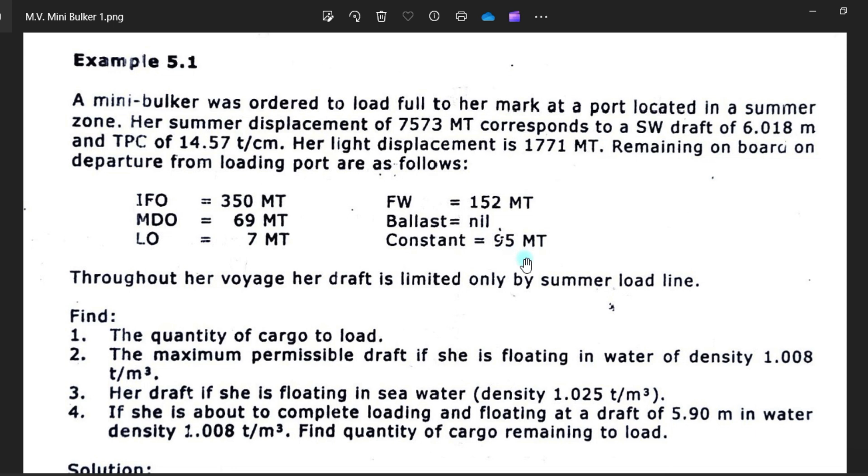And it says here, throughout her voyage, her draft is limited only by summer load line. So throughout the voyage, the vessel should maintain the summer load line mark.

Okay, and this question is find. Number one, quantity of cargo to load, the maximum permissible draft if she is floating in water density of 1.008 tons per cubic meter. So meaning, what will be her draft when the vessel floats at 1.008 at loading port?

Her draft if she is floating at sea water density of 1.025. So what will be her seawater draft when she is outside the ocean with a density of 1.025?

If she is about to complete loading and floating at a draft of 5.90 meters and water density of 1.008, find the quantity of cargo remaining to load. So when the vessel at port, when loading, reaches a draft of 5.90 meters, what will be the remaining cargo if the vessel floats at a density of 1.008?

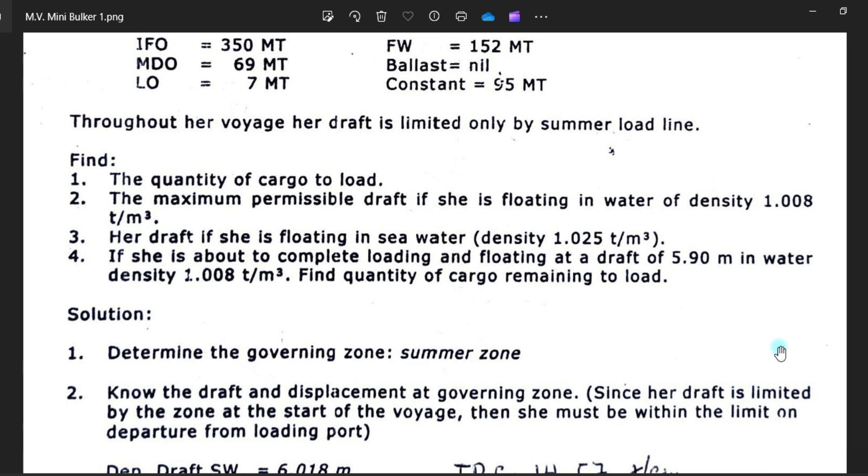Okay, and this is the solution. Determine the governing zone. The governing zone is summer draft because she is floating within the summer zone. Know the draft and displacement of the governing zone. So the vessel is in the area of the summer draft, which is 6.018. This will be her departure draft at loading port, and the displacement of this draft is 7573 metric tons, and the TPC is 14.57. So let's investigate.

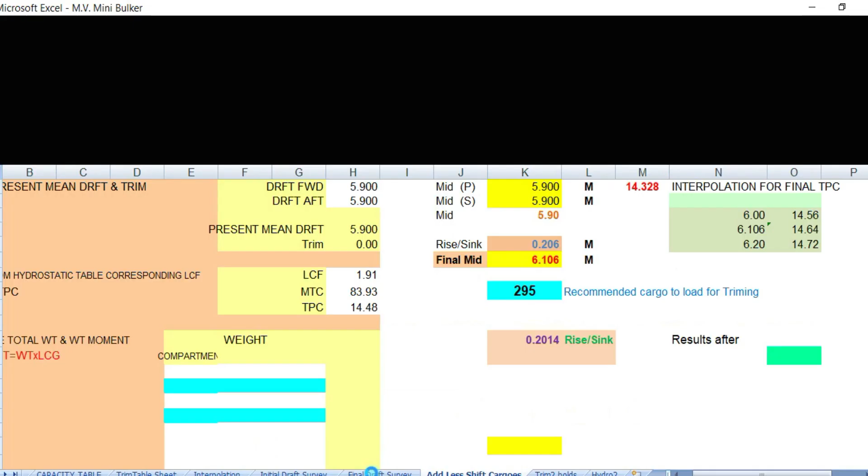Summer draft, maximum summer draft is 6.018. Let's see this one. Then we go to the capacity table.

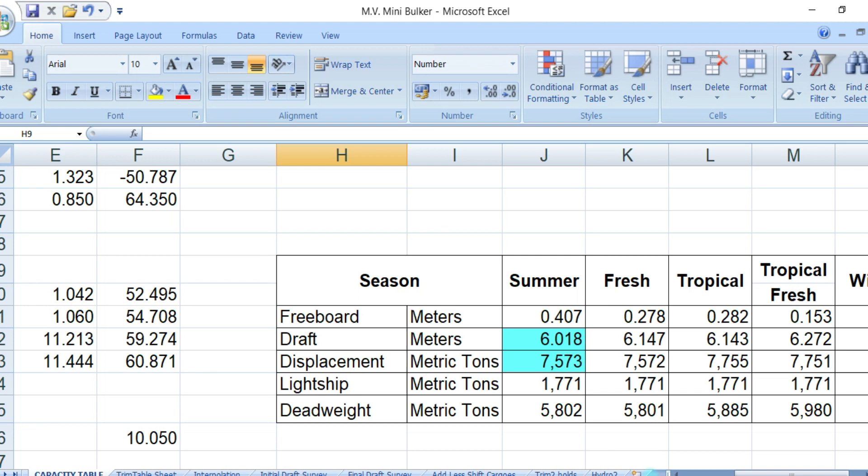So summer, this is the load line location, and the draft of summer is 6.018, and the displacement of summer draft is 7,573, and the light ship is 1,771. Okay, then we go.

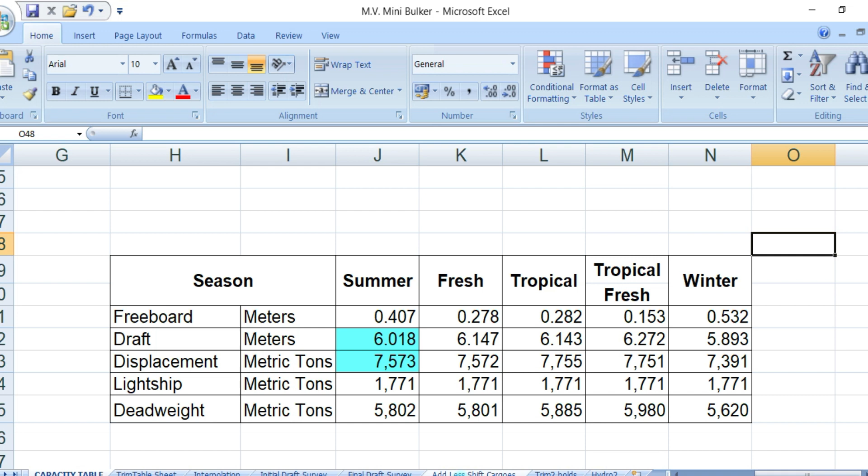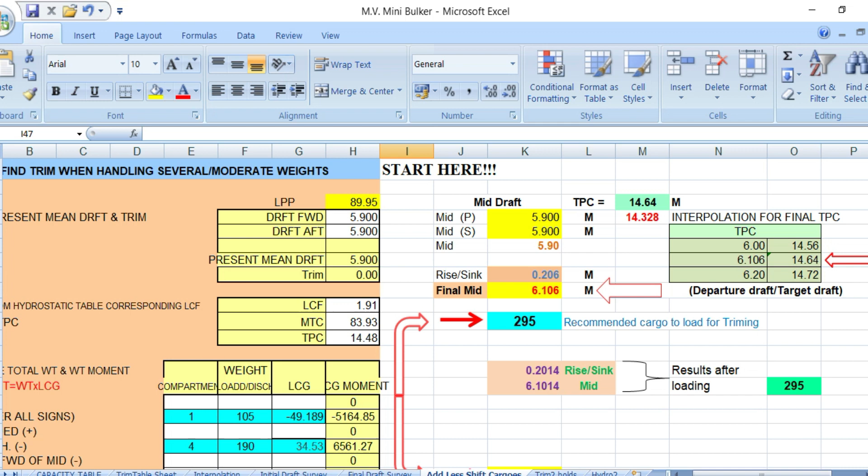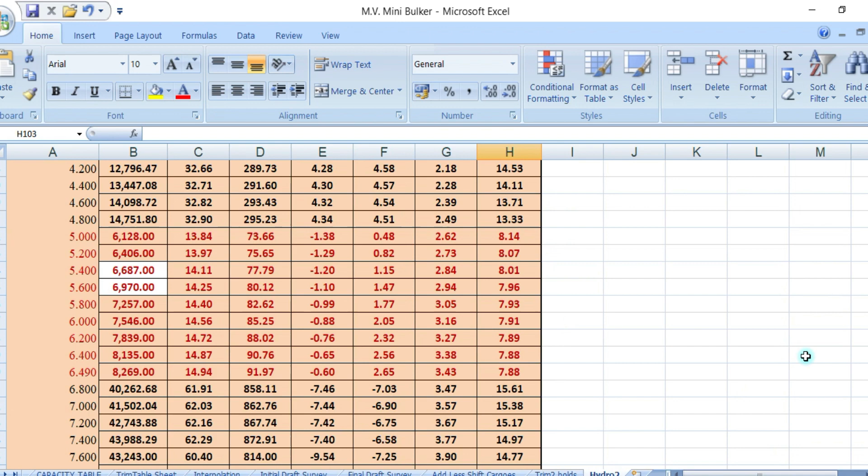The maximum summer draft is 6.018, forward and aft 6.018, and the TPC is 14.57. So we check that one, I just set the table, then we go down. See, the draft is 6.018, TPC is 14.57, and displacement is 7573. It should be 7573.

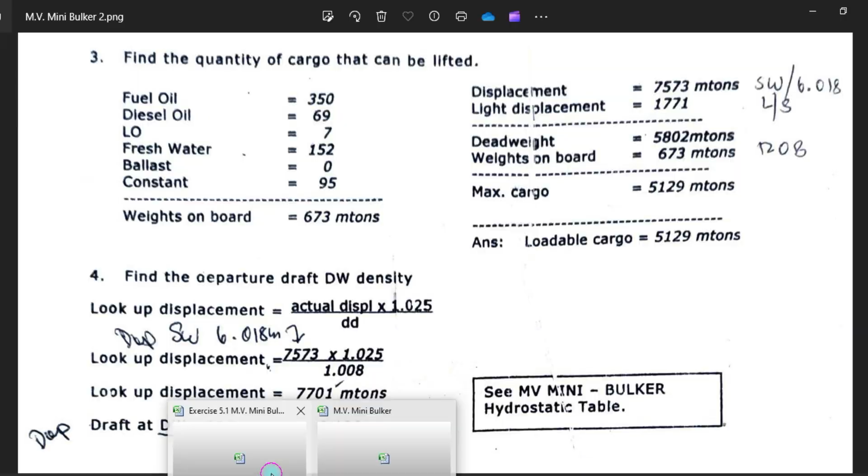Okay, so we go back, then we go to number 2. Number 2. Number 3. Is that correct? Double check again. Oh sorry, that was number 2. So we go to number 3.

Number 3, find the quantity of cargo that can be lifted. So we will add all the remaining cargos on board: fuel, diesel, LO, freshwater, ballast, and constant. Summing all weights on board or remaining on board is 673.

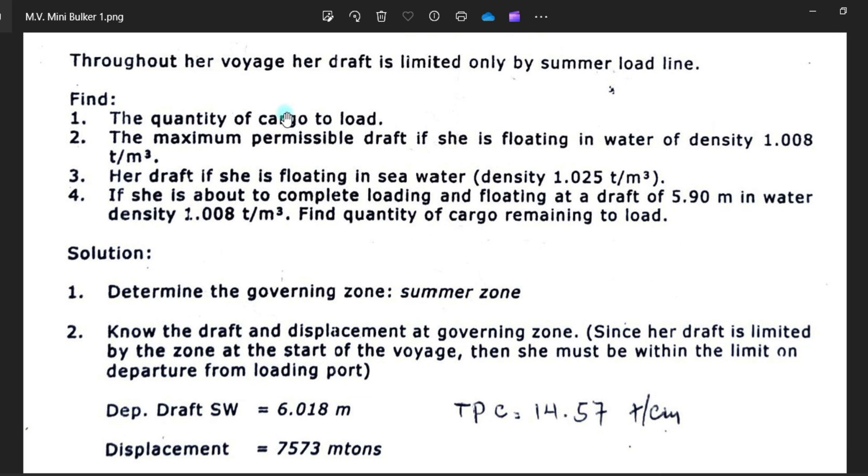And the question a while ago was the quantity, how much cargo are we going to load, maximum cargo. Okay, so check on that. With the summer draft or departure draft of salt water of 6.018, the displacement is 7573.

You deduct it with the light ship, which is the light displacement of 1771, and you will get the dead weight, which is 5802. So displacement minus light ship will be your dead weight of 5802, then you minus the ROB or the weights on board, and the maximum cargo to load is 5129 metric tons. So the answer is loadable cargo is 5129 metric tons. This is the maximum cargo to load with a draft of 6.018 or summer draft.

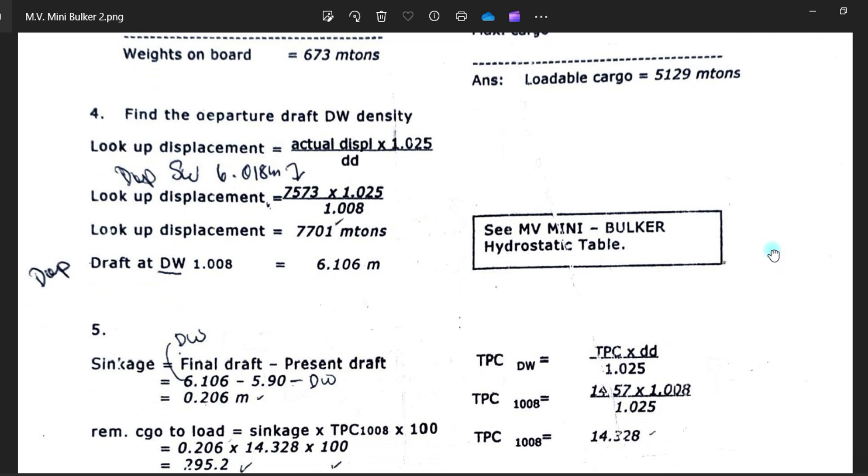Okay, the next, number 4, find the departure draft at dock water density. So remember, when you're loading at the loading port, the density on the local port is 1.008. So with the summer draft of 6.018, what will be her draft if your density is 1.008? Okay, so convert this summer draft or saltwater draft to dock water density of 1.008.

Okay, so this is the solution, guys. To find the displacement when you have a density of 1.008, the formula is the actual displacement times your constant of 1.025 over your local density. So your actual displacement is 7573, which is the summer draft of salt water or your departure draft, times the constant of 1.025 over your local density of 1.008. And the resultant is the new displacement will be 7701 metric tons.

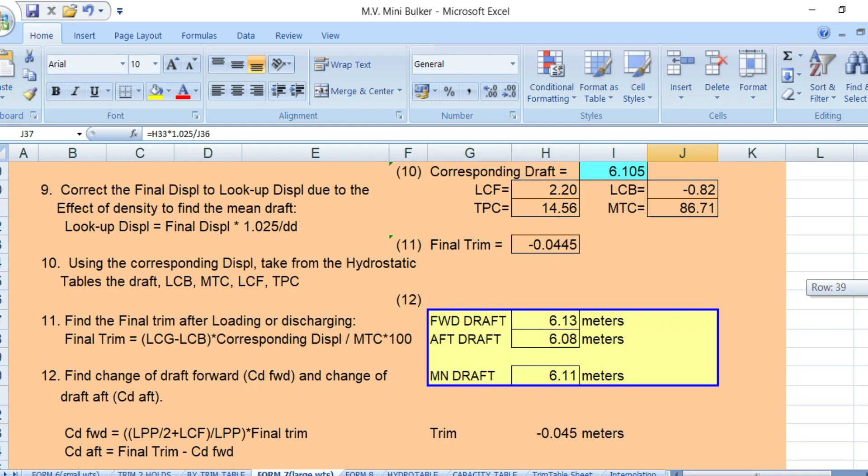So let's investigate, guys, by the loading program. So in the loading port, your summer drop or maximum summer drop is 6.018. The port and starboard, so your mean draft will be 6.018 and the density of 1.025. That will be in your loading port, the departure draft.

But since you are floating in a dock water density of 1.008, what will be your displacement in your departure draft? So when you are floating in a density 1.008, your displacement will be 7701, or draft is 6.105, which is this one.

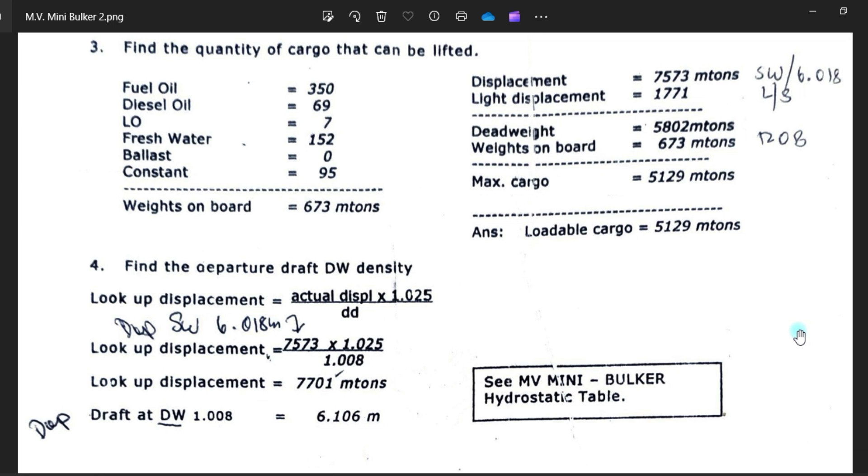So your displacement is 7701 and your departure draft is 6.106. Okay, I just showed you how to prove it by using this loading program. Okay.

Number five, we must get the sinkage. Okay, sinkage. So your final drop or your departure drop with a density of 1.008, your departure draft is 6.106, and your present drop when you stop loading is 5.90.

So deduct 6.106 minus 5.90, your sinkage will be 0.206, meaning from 5.90, how much would it take to reach 6.106? So it would take 20 centimeters to reach the departure drop of 6.106, your departure drop with a density of 1.008.

Okay, now from this sinkage, we can now compute the remaining cargo to load, which is the formula: sinkage times TPC times 100.

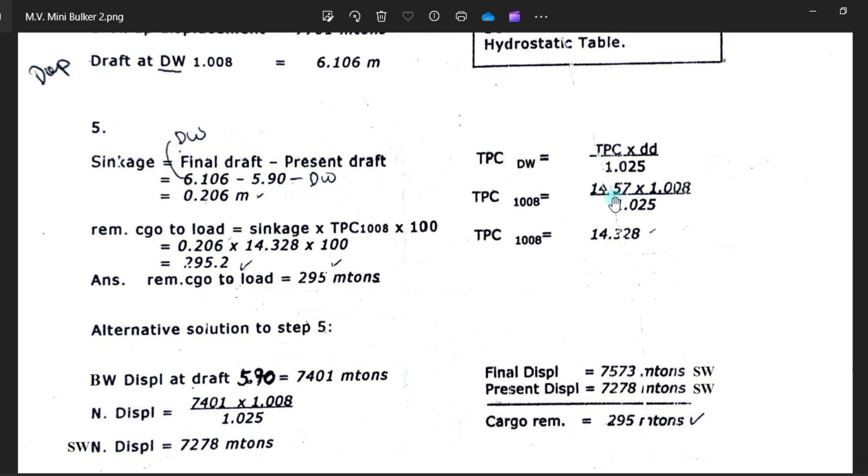So TPC of dock water equals TPC times your local density over your constant of 1.025. So this TPC, which is 14.57, is the salt water density. So meaning you put here salt water TPC of 14.57, which is this one, the density of this one, the TPC of this one. Okay.

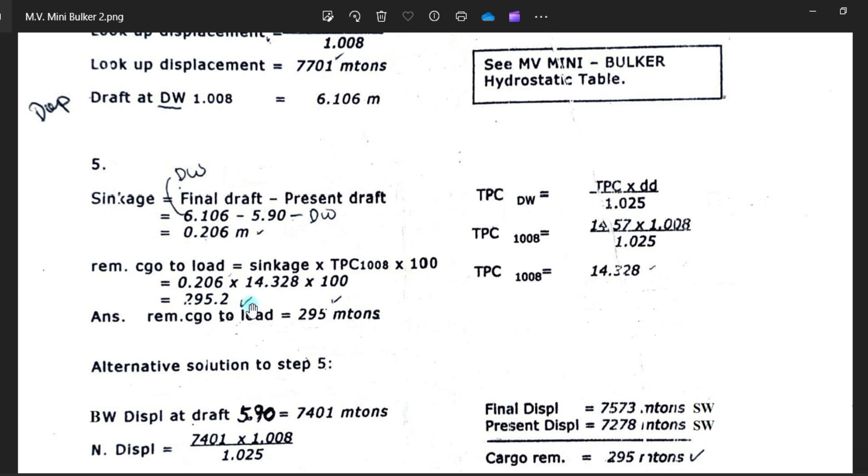So this one, and times the local density of 1.008 over 1.025 constant, and the value of TPC of your local density is 14.328. So you put here 1.008, which is the density of 1.008. So to complete the formula, sinkage, which is 0.206, which is this one, times your TPC is 14.328, which is this one, times 100 constant, and the answer is remaining cargo to load is 295.

Okay, 295. So we will prove this by using the program.

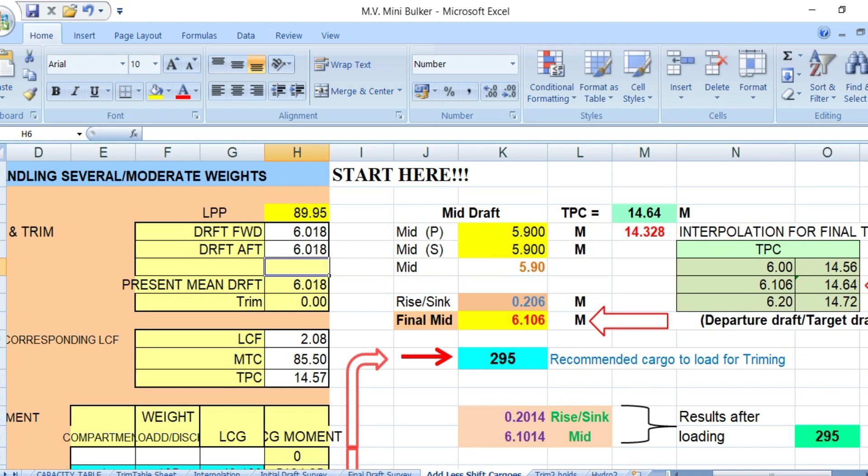So when we stop loading, it says stop loading at 5.90, 5.90, to get the remaining cargo to load. So 5.90, and you get the mid draft here. Let's say actual draft here is the same at port side, mid port side 5.90, and starboard side is 5.90.

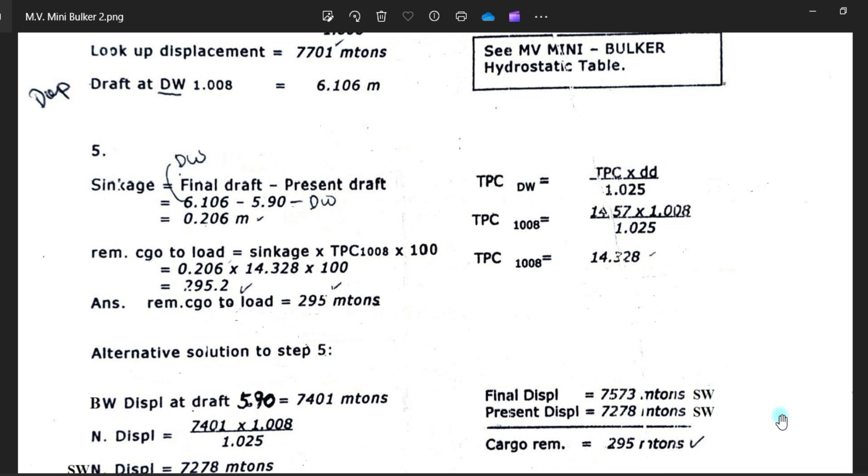Okay, and your sinkage and your final departure draft would be, this is your final departure drop of loading port, is 6.106 of the density of 1.008. Okay, 6.106, 6.6, 6106, 6106. So your departure drop is 6.106. Okay, so your sinkage will be 0.206.

So 6.106 minus 5.90 is 0.206. Meaning from this mid drop, or when you stop loading, how much more cargo, how much more centimeters shall we go to reach 6.106? So it takes 20 centimeters from 5.90 to reach 6.106.

Okay, now with this sinkage we convert this one to metric tons, okay, to cargo. So to find this value of this sinkage, this is the formula. Formula would be sinkage times TPC times 100. That is the formula. Okay, remember. Okay, sinkage to get the remaining cargo to load equals sinkage times TPC times 100.

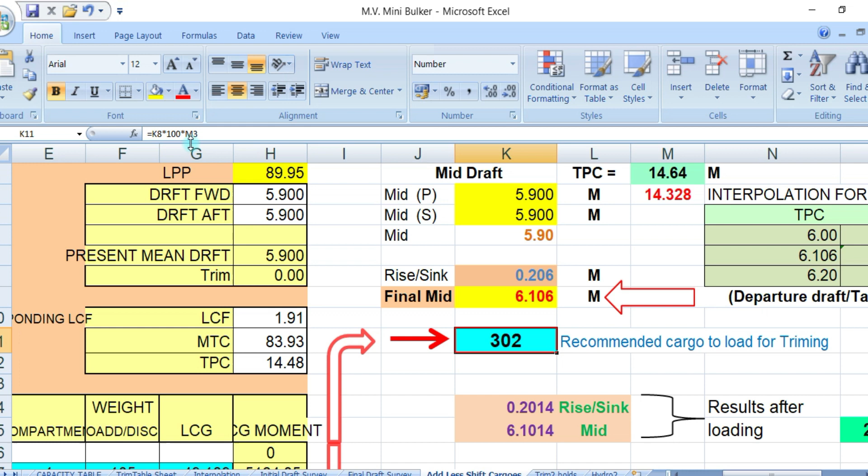So the problem says sinkage, which is K8, K8. So sinkage multiplied by 100 multiplied by TPC. M3 is 1 TPC. Okay. Sinkage is this one, K8 and 100. So to get the value of recommended cargo to load is K8, which is the sinkage, times 100 times TPC.

What is this TPC here? M3, M3. But remember guys, this is not the value that we are looking for. We are looking for this value, this 14.328, because you converted from the TPC of 14.57, you apply this local density to get this new TPC of 14.328.

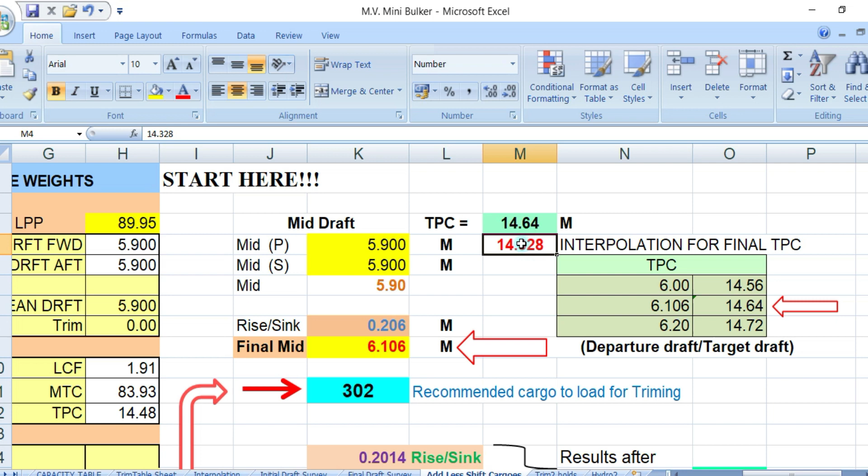So remember this 14.57. This is the departure, the TPC of this departure drop is 14.64. So what we need is 14.32. And what is the, what is the cell, is M4.

So with this formula, we put here M4. So this one, see? Here, M4. So your K8, which is the sinkage, times 100 times your TPC of 14.328, and the resultant will be 295. So recommended value or cargo to load is 295. Okay.

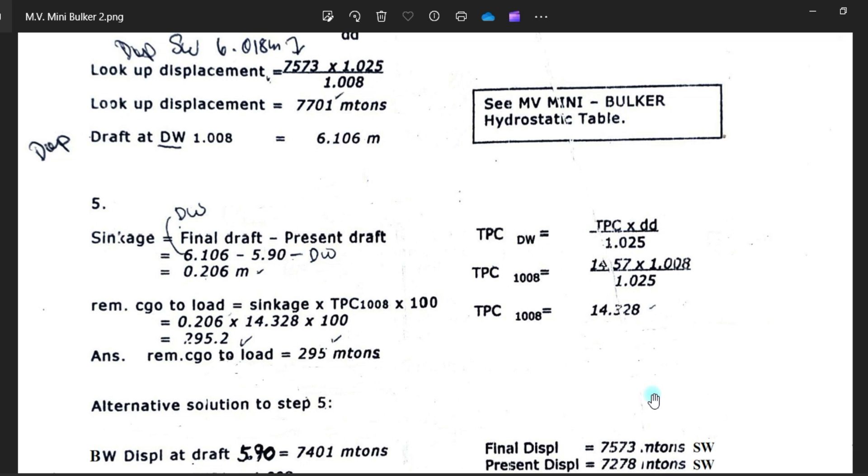And there's another solution on how to find the remaining cargo. This is another solution by using the displacement. Okay. The solution is when you stop loading in the draft of 5.90, which is the brackish water, the displacement of 5.90 is 7401. Okay. We'll try to check this one.

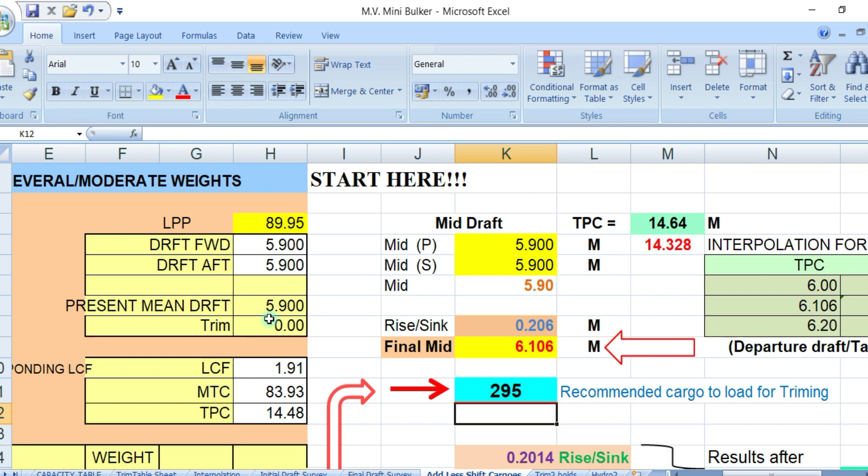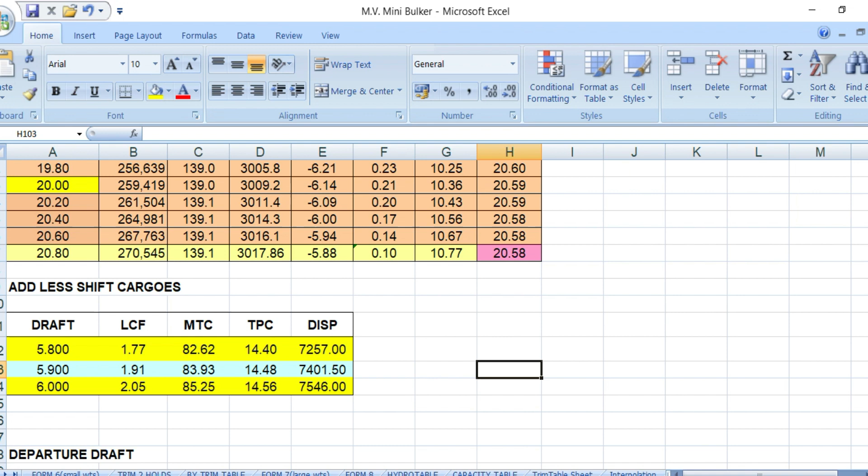This one. Put here. 5.90. How much would be that if his density is 1.025?

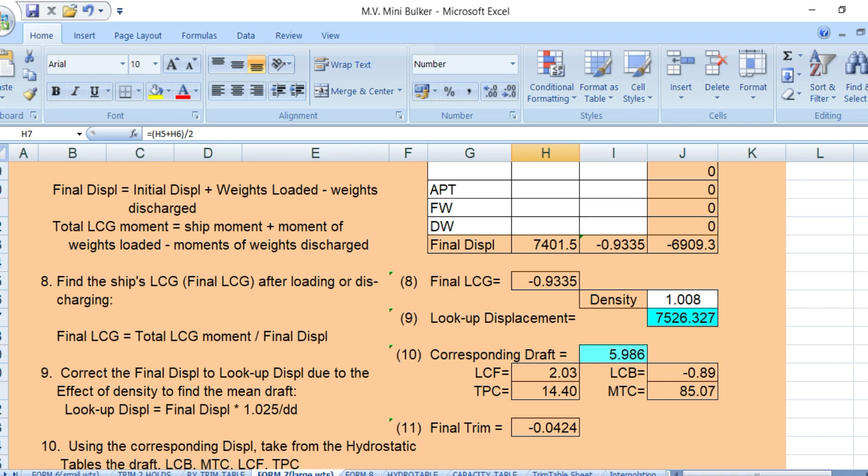7526. Okay, we check again.

Brackish water. We put this one, we'll convert this one to salt water. Back again, this 1.008. Then we'll put it. How much would that be in salt water? 1.025.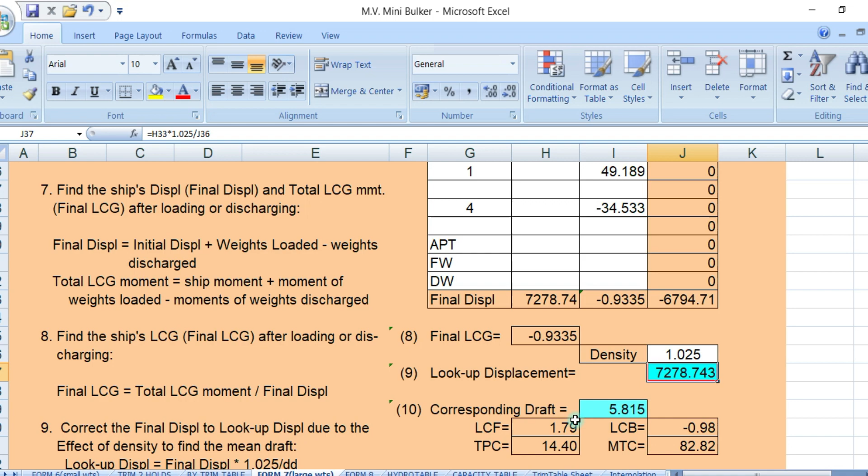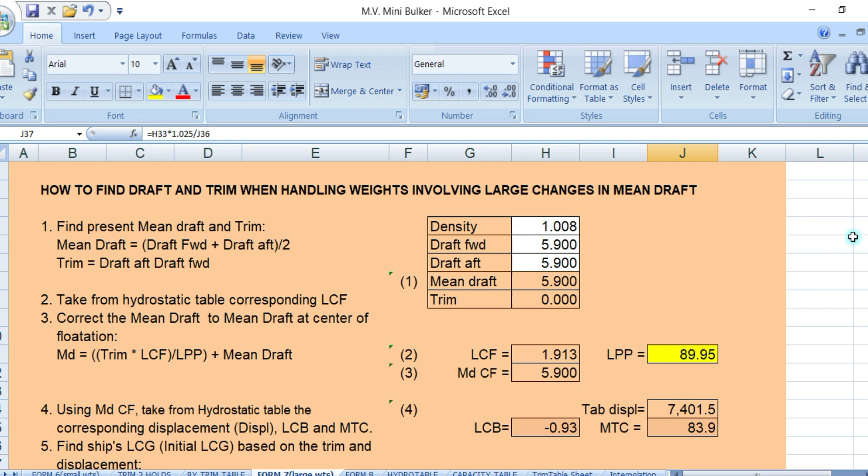So you see guys, from the local port, when you stop loading, the draft was 5.90 with the density of 1.008. So the displacement for this local dock water is 7401. Okay, which is this one. 7401 of brackish water of 1.008.

How much would it be if it is floating in salt water? So in salt water should be 7278. Okay, so check this one.

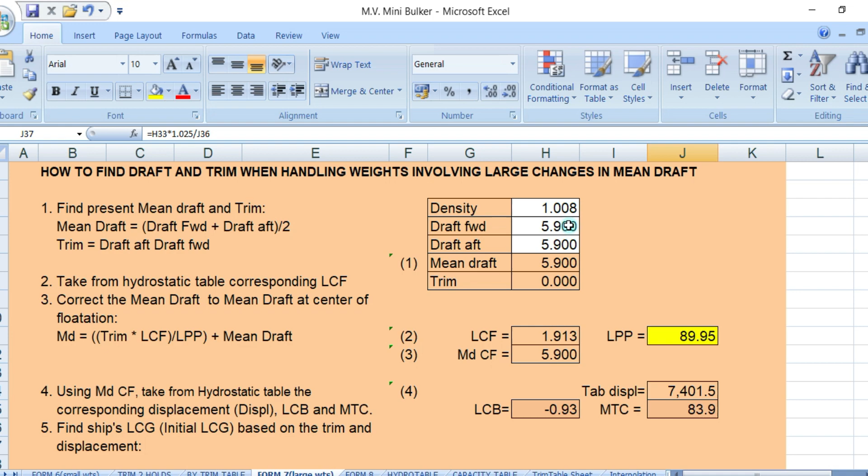So from 1.008 density, how much would be in salt water? So we put 1.025, so in salt water the displacement will be 7278. And this one, salt water will be 7278.

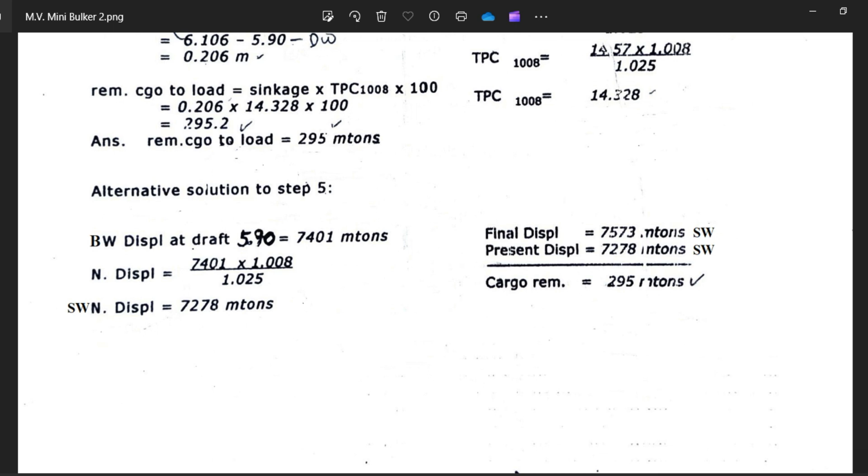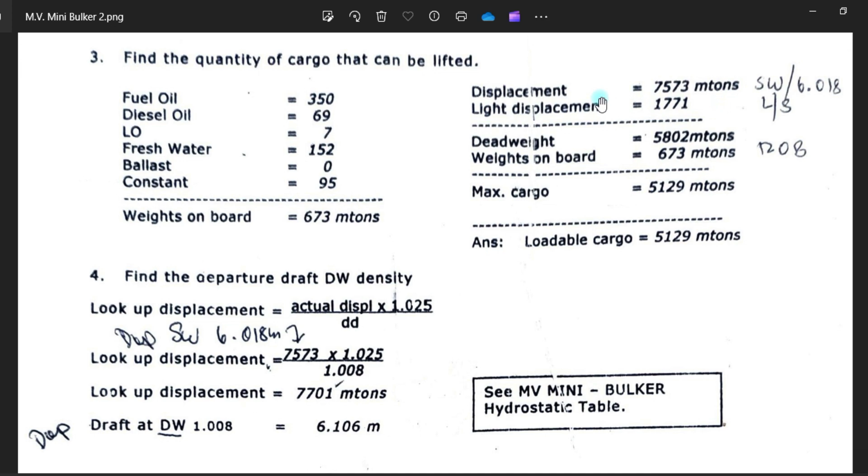Okay, so this is what we're looking for. The departure draft was 6.018 in salt water, which is displacement of 7573, minus your new displacement or present displacement is 7278. You deduct this one and you will have a resultant of 295 metric tons. Okay, I hope it is clear to you.

So there are two solutions, guys. One is the sinkage, and the alternate solution is by getting the density or displacement. So getting the displacement, okay.

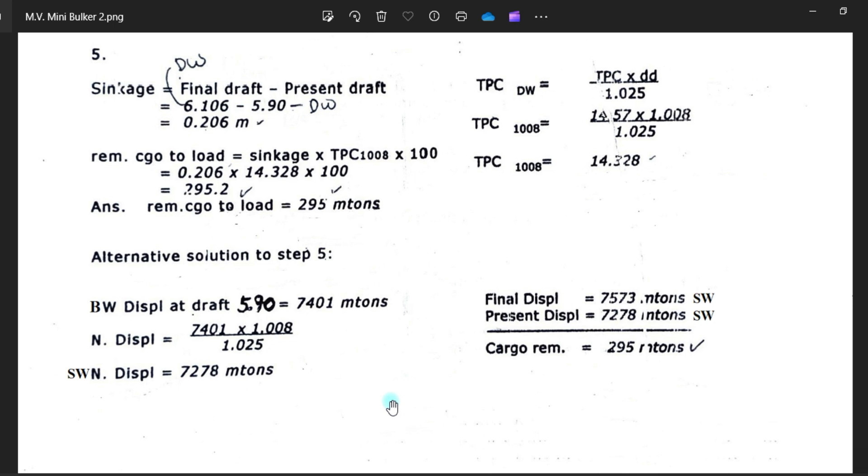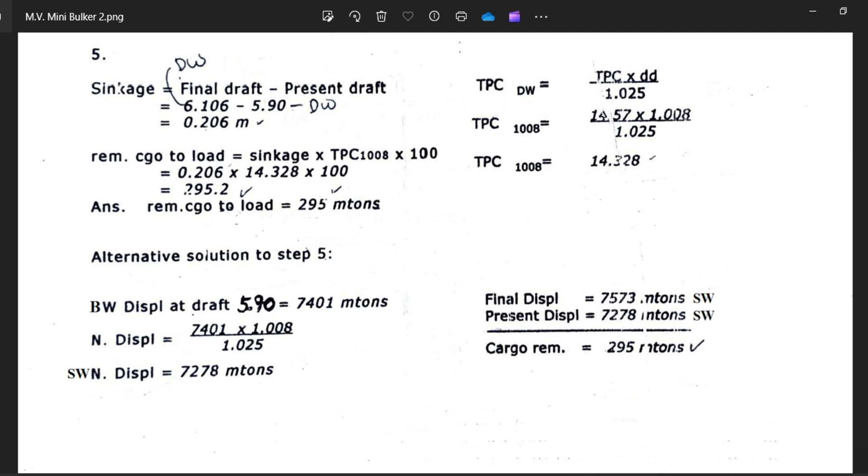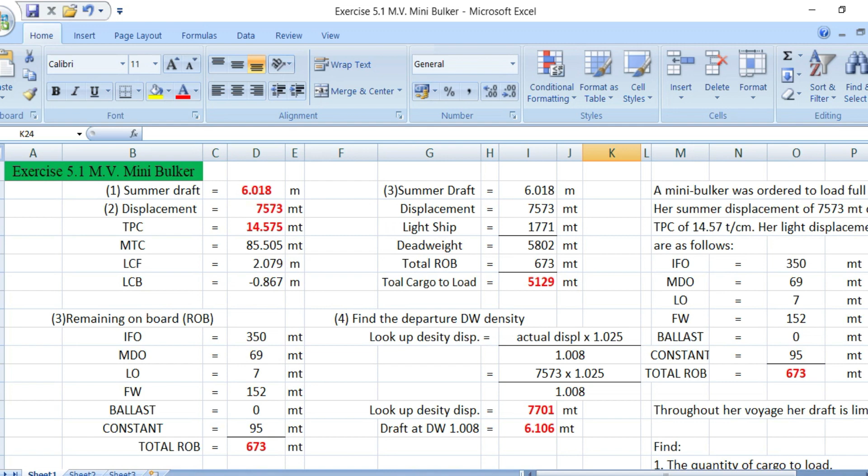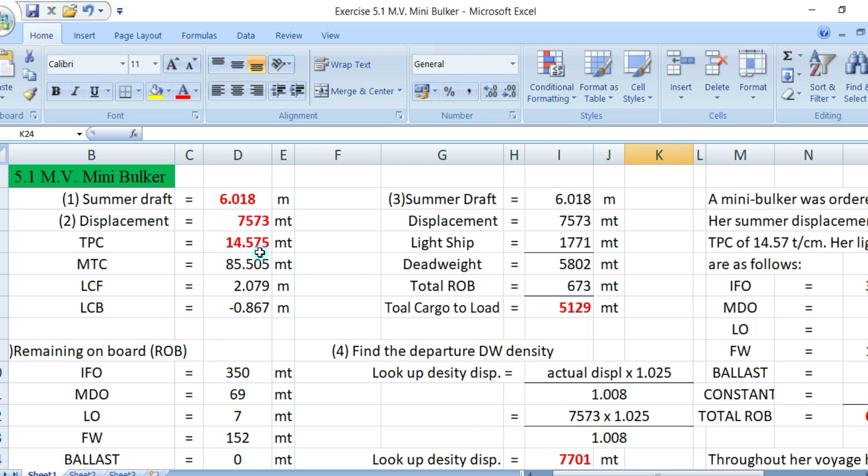That's it, guys. And here is another solution that I made. Okay, so we got the summer draft displacement here, and TPC is 14.575.

That will be number 2, number 3 remaining cargo on board. You add all, re-add all the remaining cargoes, then you have a total of 673. So we go to number 4.

Number 3, so summer draft is 6.018. The displacement will be 7573 minus your light ship, that will be your dead weight of 5802. Minus your ROB of 673, your total cargo to load will be 5129. Okay?

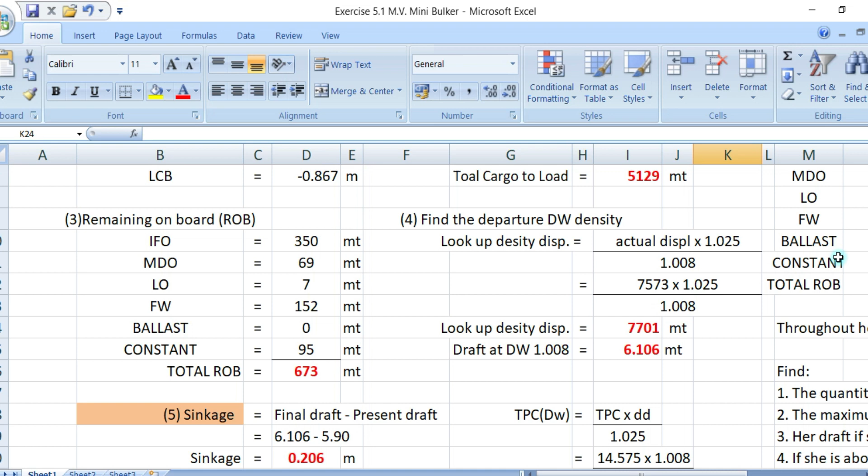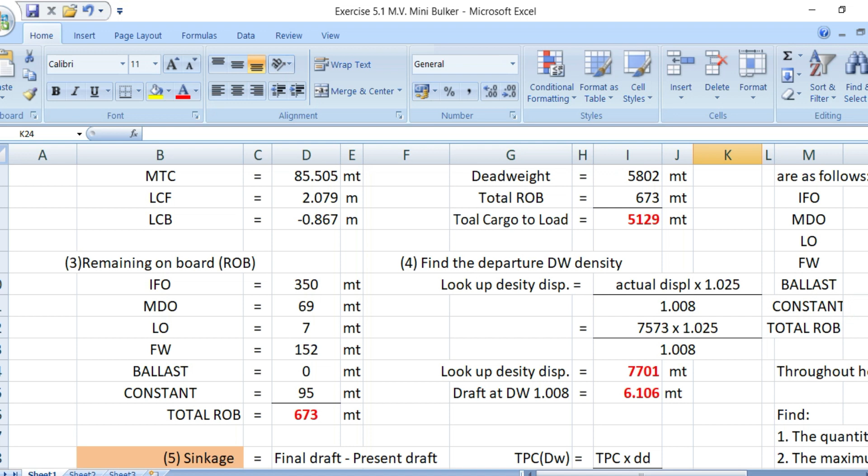And number 4, find the departure dock water density. So your actual, the summer density would be with this draft or this density, your departure density of salt water, how much would be in density of 1.008. So this one, displacement times 1.025 constant times over 1.008. Your conversion of the dock water density displacement will be 7701 or 6.106. Okay, and that will be number 4.

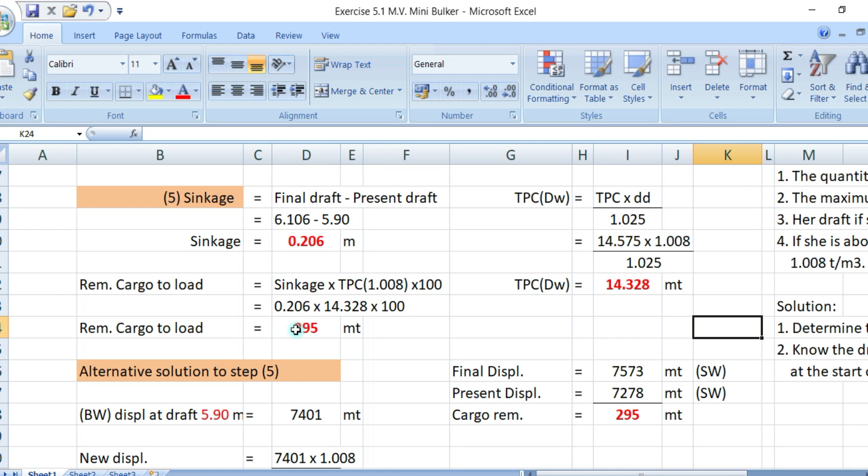And number 5, sinkage will be your final draft minus present draft, which is the dock water of 1.008. 6.106 minus 5.90, your sinkage will be 0.206, and the formula for cargo to load will be sinkage times TPC times 100. So your sinkage is 0.206 times density of 14.328, which is this one. You convert the salt water to local density of TPC, will be 14.328, which is this one, and this 100. You will have a displacement or remaining cargo to load of 295. Okay, and this is the other solution

by using the displacement. Okay, so this brackish water of 5.90 metres, you convert this one to salt water. So in conversion, this displacement of 7401 times 1.008 over 1.025 constant, and you have a salt water displacement of 7278, which is this one.

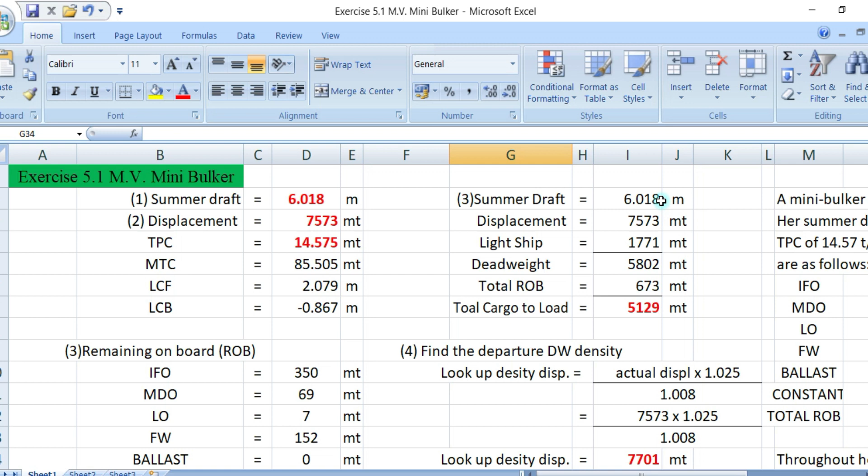So this salt water displacement, which is this one, saltwater displacement, which is this one, and minus your displacement of 7278 of saltwater, which is this one. You will have minus this one, and you will have a remaining cargo to load of 295.

Okay, I hope you get the procedures on how this video was presented. I hope you like it.

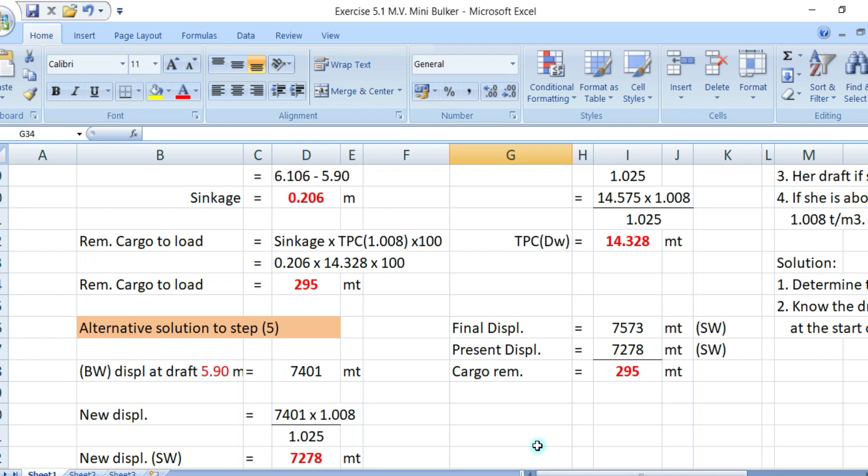Hi guys, we will now proceed with our discussions or video presentation. Now, since we have already computed our remaining cargo to load, which is 295, we're going to distribute this amount to holds 1 and 4, meaning we're going to trim the vessel, guys, with remaining cargo of 295. Okay, let's start.

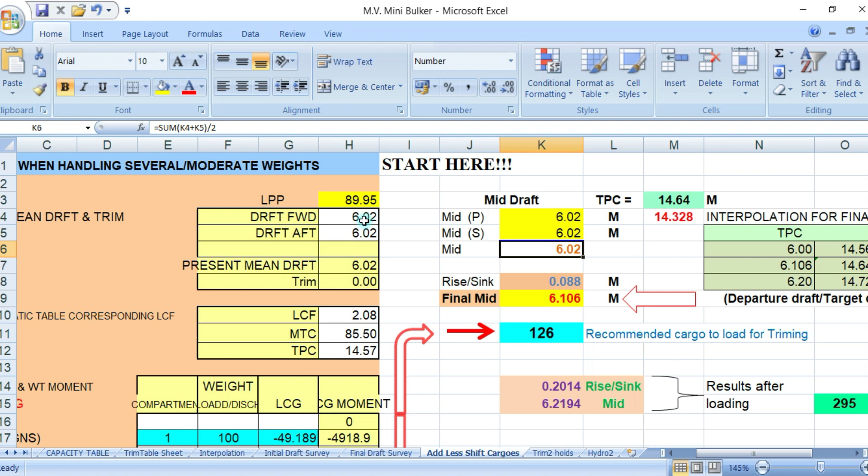Say when loading, we stop at the draft of 5.90. So put here 5.90, and aft will be 5.90. That will be forward and aft.

Okay, and since we have taken out the draft forward and aft, we'll also take the actual draft of midship port and midship starboard. For example, the draft mid port is 5.90, and our actual mid starboard draft is 5.90. So there's no list, even keel, and there's no trim.

Okay, now our final sailing draft at density of 1.008 is 6.106. This will be our final mid draft or departure draft. So we will see how to get this recommended cargo to load by this formula.

Remaining cargo to load is sinkage times TPC times 100, which gives you 295. Okay, so we go back. Here is the formula.

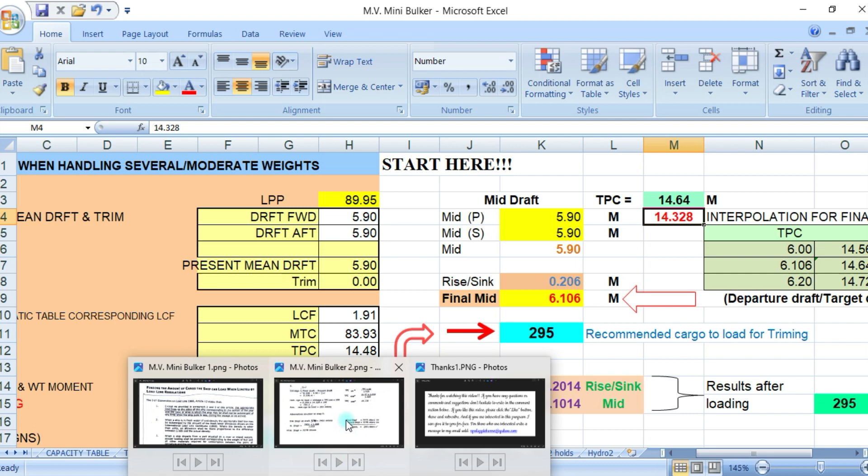K8, which is the sinkage, equals 0.206 times 100, a constant, times M4. M4 is this one, letter M row 4, which will be 14.328, this one. So sinkage is 0.206 times the TPC of 14.328 times 100.

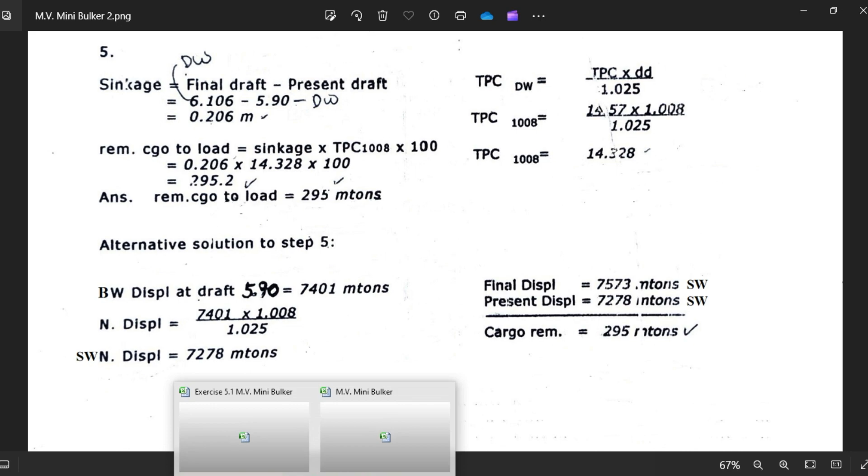You have a total amount of remaining cargo to load which is 295. That's why you get 295 here. Now once you get 295, follow the arrow, then you put here 295.

For example, if you put 295, you will see the results here: mid draft will be 6.1014, so it's the same, and sinkage should be 0.201, which is the same.

Let's say we put here 300, what happens? Recommended cargo to load is 300. So you put here 300, and what will result? The mid drop will almost be the same, and the sinkage will be 0.208.

Let's make it a little bit bigger, let's say 400. And say what will the results be if you put 400? The mid drop will be much bigger. See, this is 6.17 and your sinkage is 0.27.

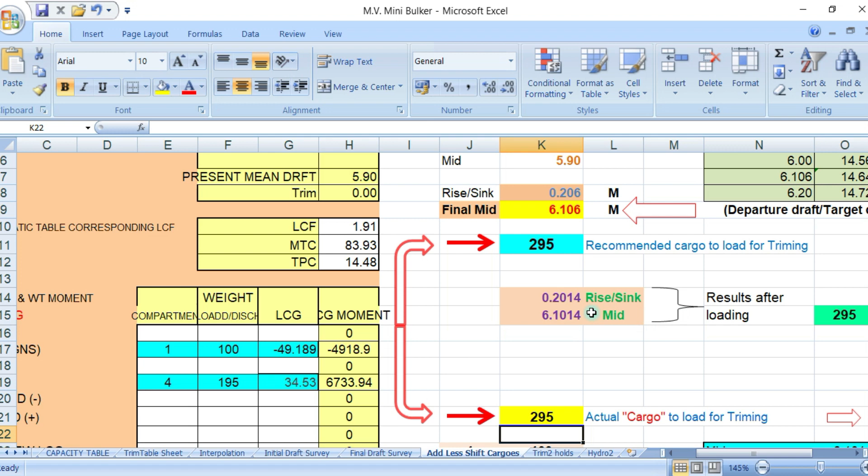But the recommended is 295. Here you can see 295. After loading 295, the result of your mid drop is 6.10. It's almost the same, and your sinkage is 0.20, which is the same.

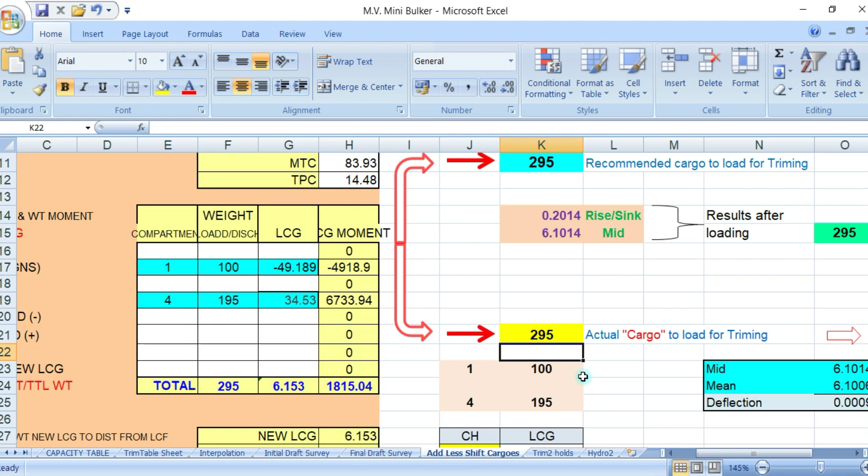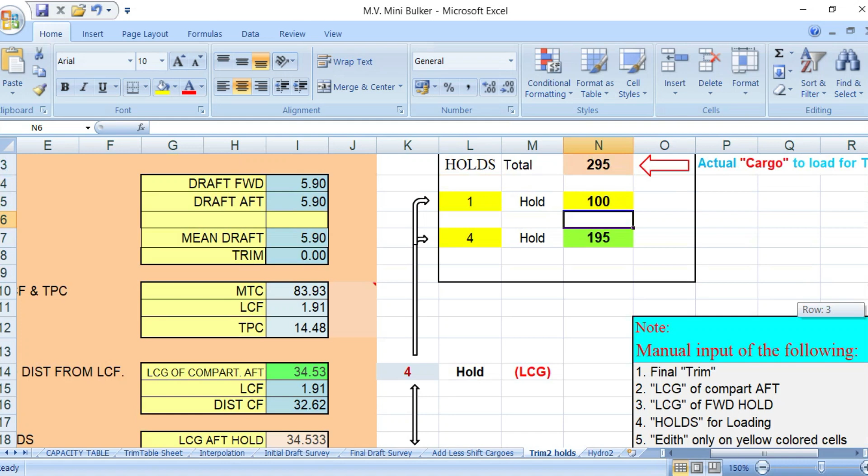Then, according to the program, once you have loaded this 295, you go to trim two holds, which is this one. Here, remaining cargo is 295, and remaining cargo here is 295, actual cargo to load for trimming.

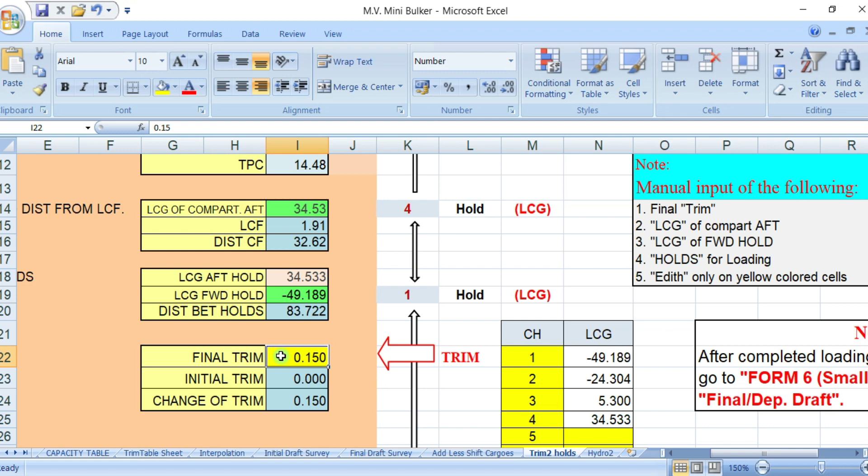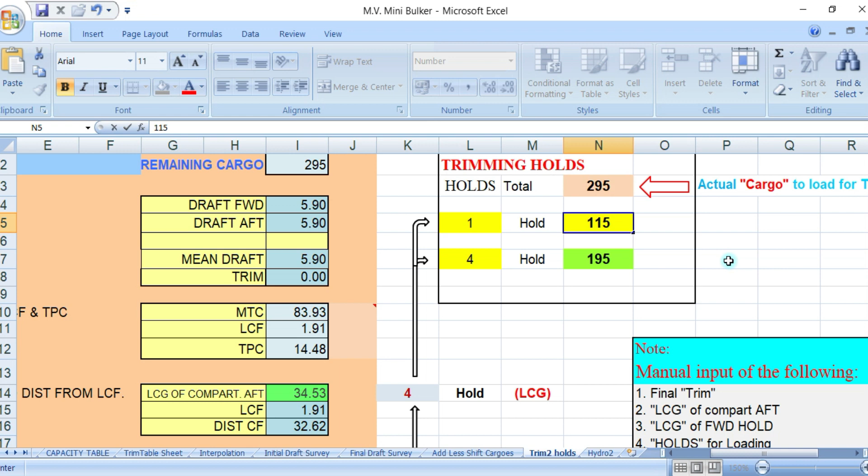Let's say your trimming holds are 1 and 4. Let's say you have no list, no trim, put here 0, and what will be the recommended cargo to load in number 1, which is 115. Put here 115, and number 4 will be 180. See, 180 in hold number 4. And what will be his final draft?

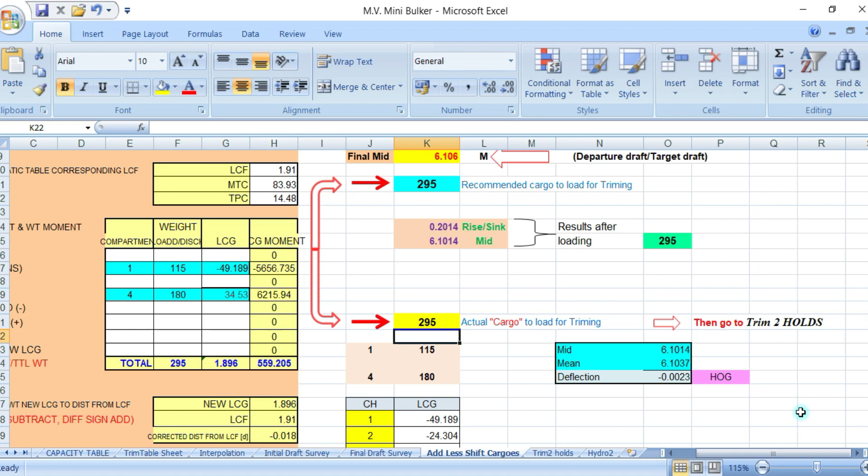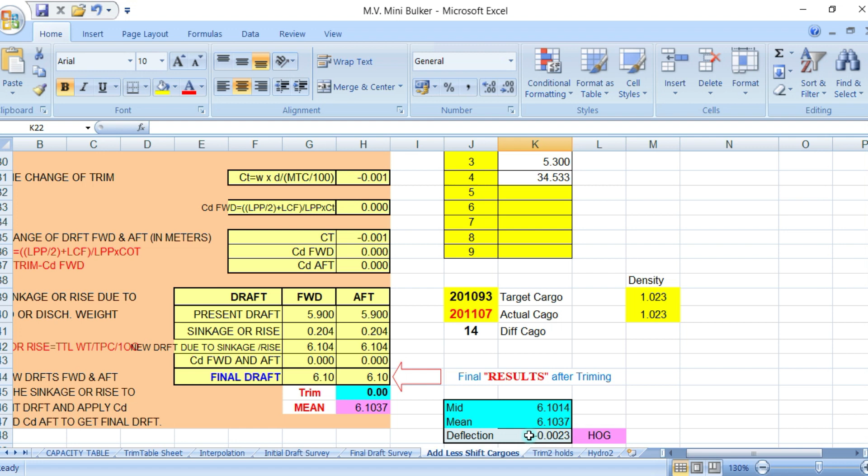Your final draft here, on the other side of Add Less Shift Cargoes, will be forward 6.10, aft 6.10, 0 trim, and your mean draft will be 6.1037, which is this one, zero deflection. This is the reason why I need this mid drop, which is this one. Mid drop is this one, 6.103.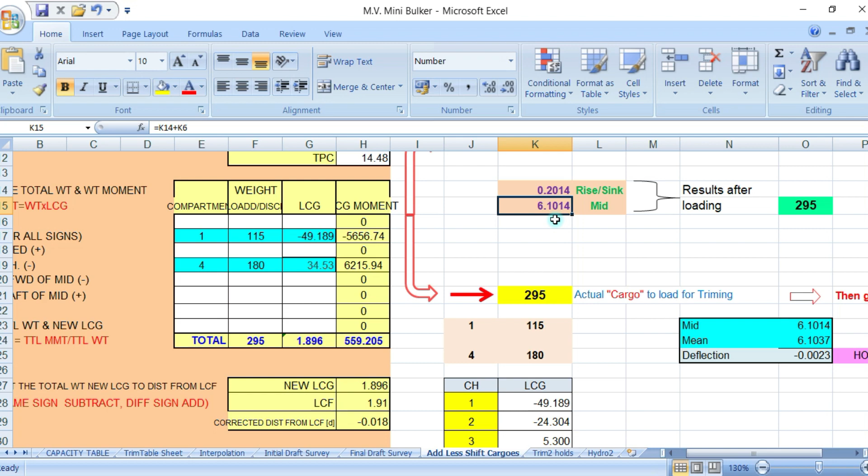Mid draft this one, I'm sorry, this one, 6.10104, 6.1014, which is this one.

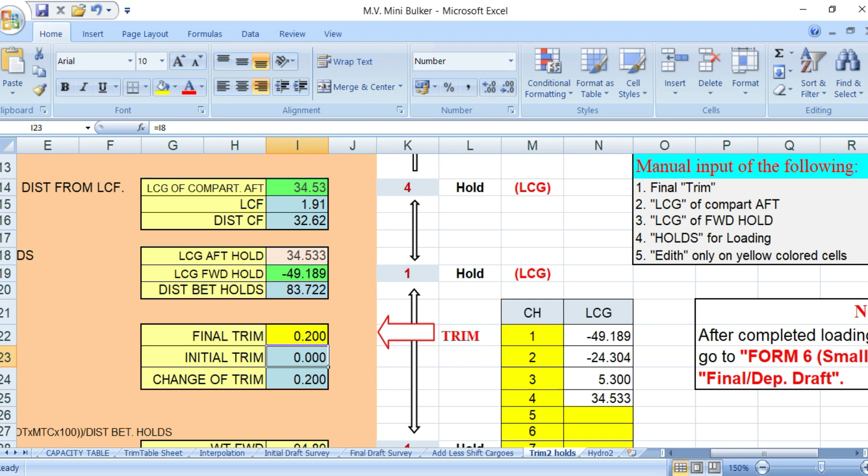For example, you want a trim of 20 centimeters by the stern. So put here 0.20 by the stern. And what will be recommended cargo to load in number 1? Number 1 will be 95, and aft will be 200.

Okay, and you still have zero deflection. So we go on the other side and make it a little bigger.

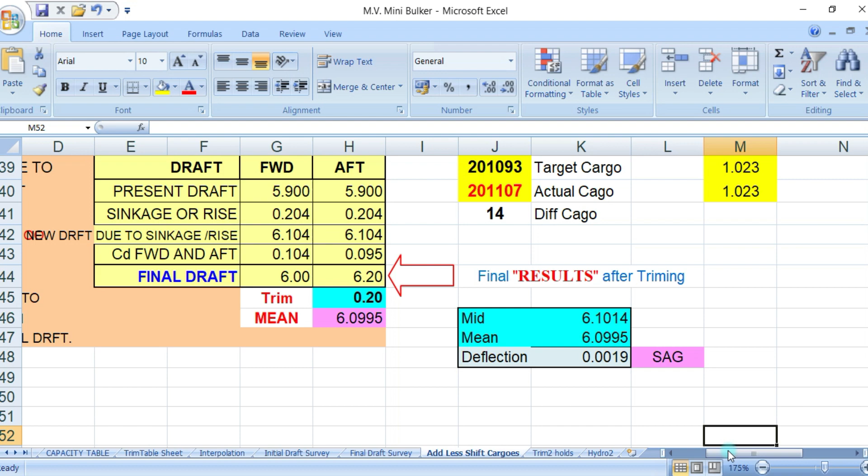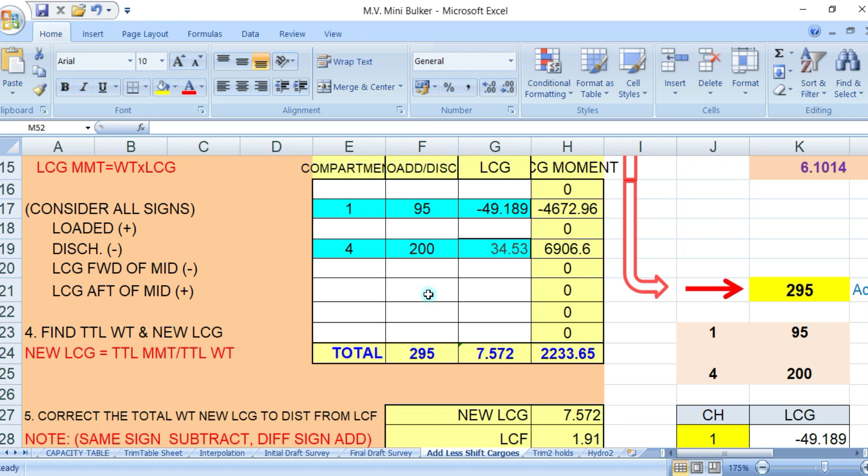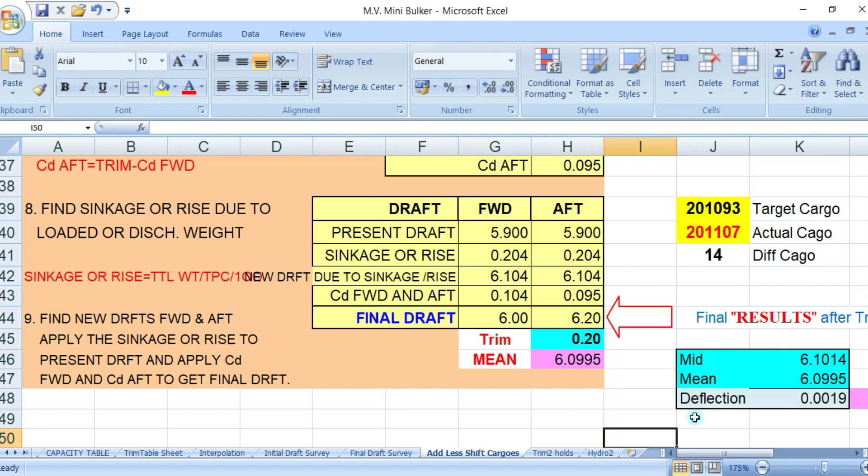So when you loaded hold number 1 with 95, number 4 with 200, the resultant will be forward 6 meters and aft 6.20. You have a trim of 20, and your mean will be 6.0995, or zero deflection. So we make this smaller.

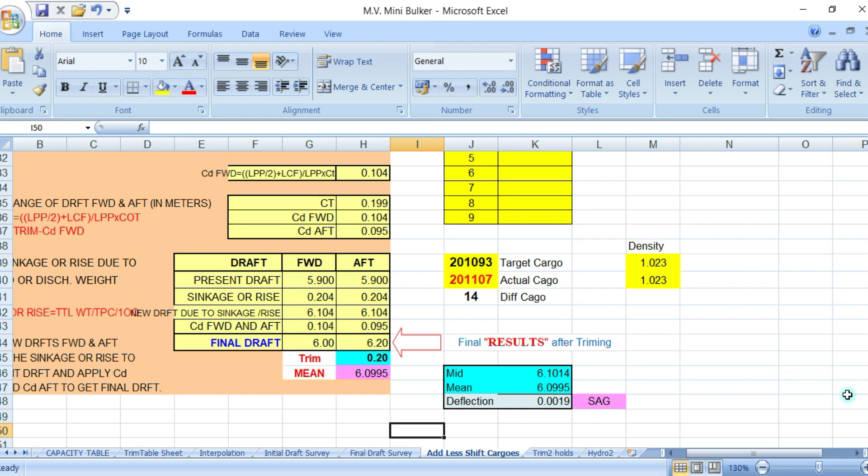That's it, guys. So whichever holds you like to use for trimming, you can choose the hold which you like. You can put here 2, you can put here 3 if you like. And what will be the recommended cargo?

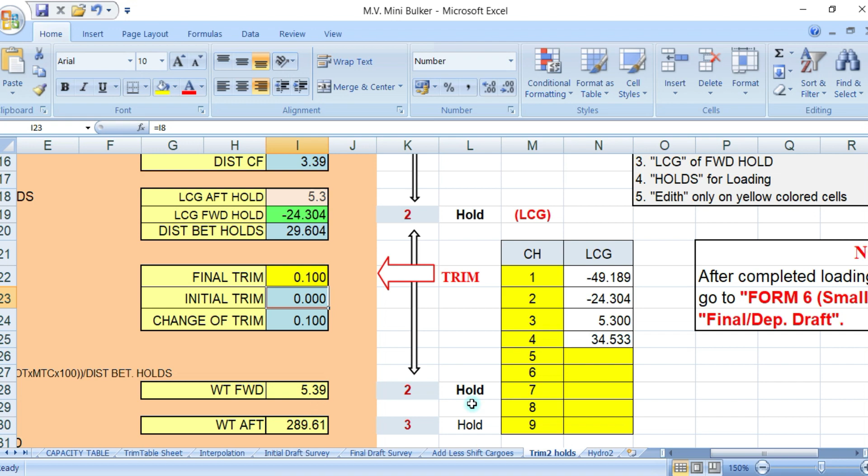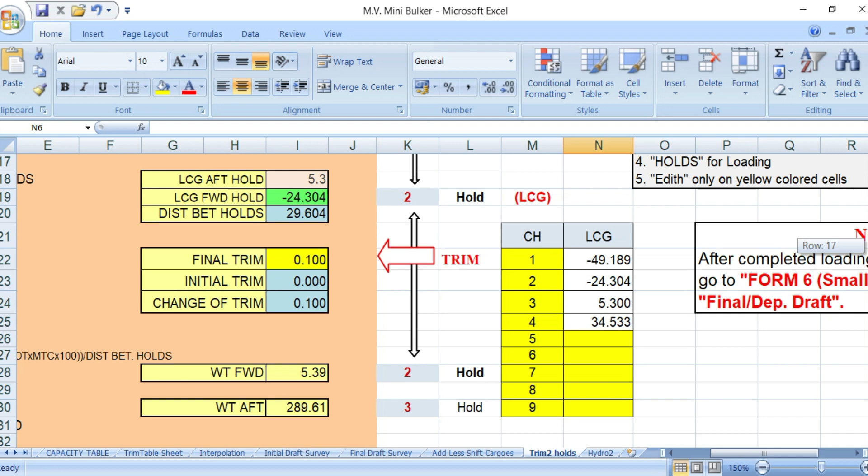Let's say you want a trim of just 10 centimeters. So recommended for forward will be say 5 metric tons, and 290 in hold number 3. Hold number 3 is 290. What will his trim be? 10 centimeters. So forward will be 6.05 and aft will be 6.15.

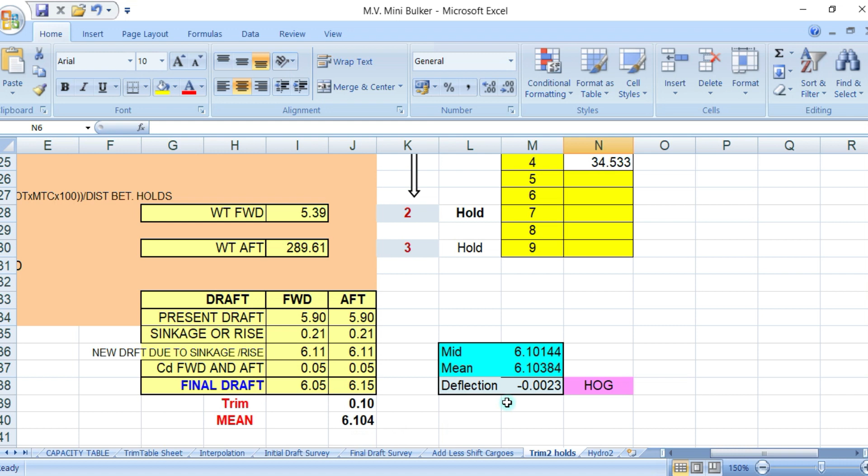10 centimeters trim, and your mean draft will still show zero deflection, and that will also be the same here. So you have forward draft of 6.05, aft draft of 6.15, trim of 0.10, and mean draft here, and you still have zero deflection.

So that's it, guys. I hope you like this video.